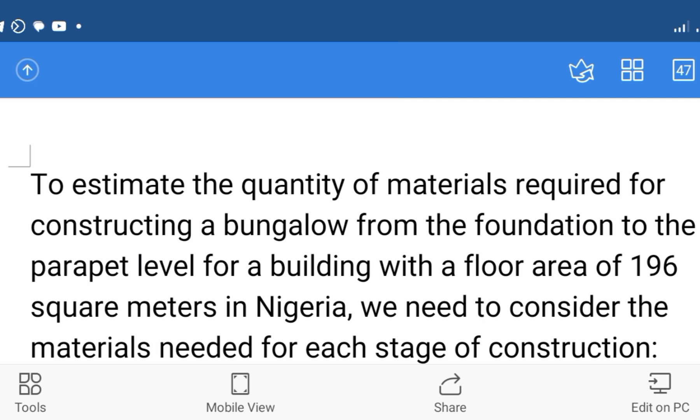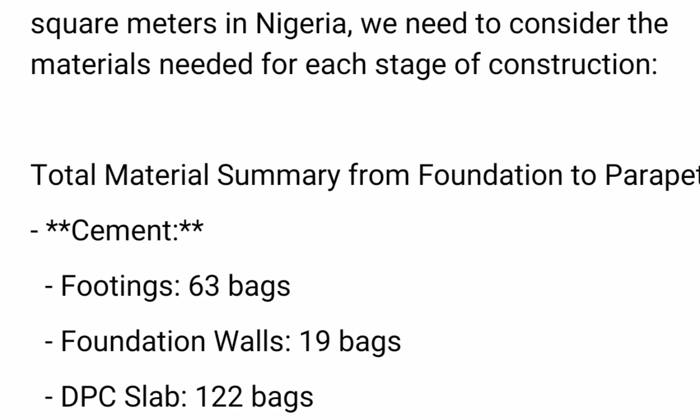We are just going to calculate the materials for you to know what to expect while building this kind of house. Actually, the example I use is a 5-bedroom bungalow.

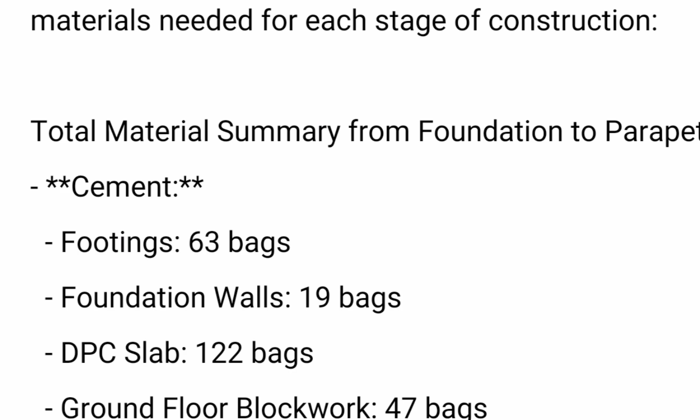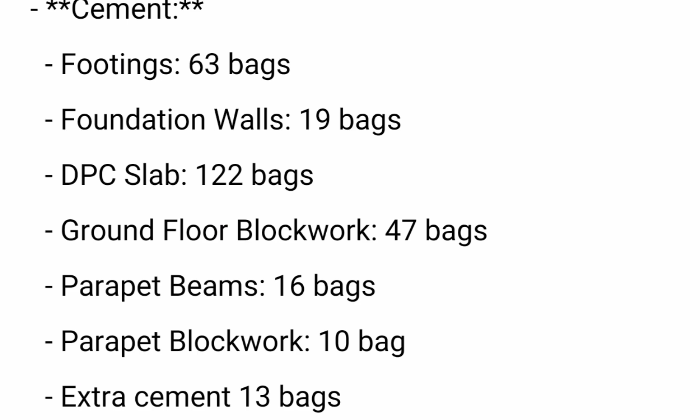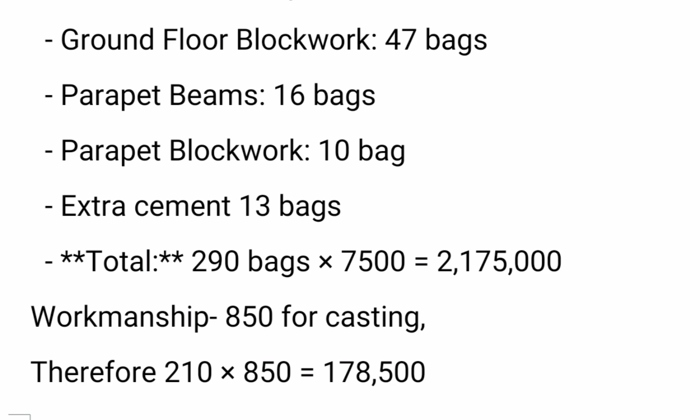So the total material summary from foundation to parapet: cement, during the footing level 63 bags, foundation walls 19 bags, DPC slab 122 bags, ground floor block work 47 bags, parapet beam 16 bags, parapet block work 10 bags, extra cement - I'm always talking about extra cement blocks, all these ones you need extra in case. So totaling 290 bags of cement at the rate of 7.5, and it gives us 2.175 million.

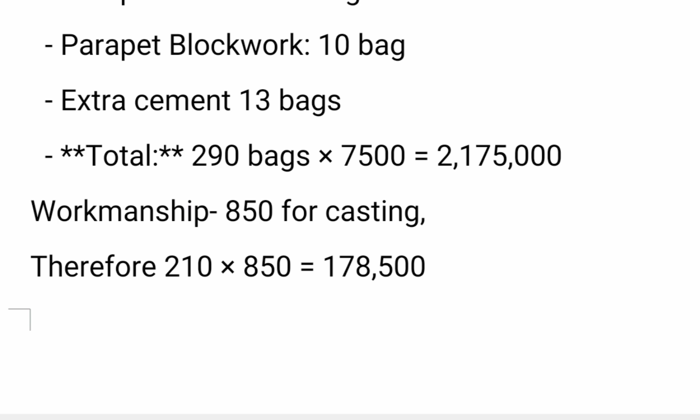Workmanship. Workmanship depends, that's why I had to break it down. It depends on your workers and your engineers. Some workers will prefer you paying per bag of cement, while some will just charge you, and both of you will bid and agree on a total price that they will do the whole work for. So here I worked with 850 for a bag of cement for casting, and when you multiply it, it gives you 178,500 for casting. I indicated it, please take note.

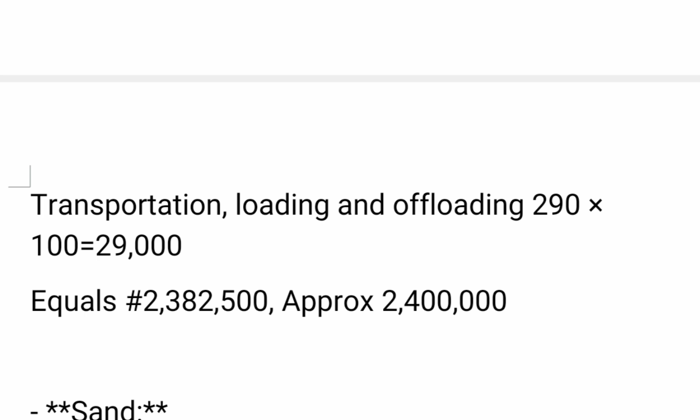Then transportation, loading and offloading - that one too depends. Some places, if you go to buy cement, they will charge you together with the price, so they charge you per cement. Some will just say pay us this for loading and offloading, while some sellers will be the ones to pay for the loading and offloading. So it depends on your area, but we just added it. This is a rough estimate, remember that. And this will give us 2.4 million.

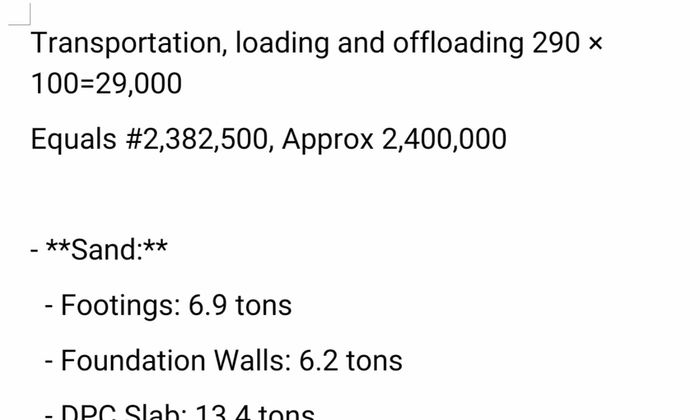Then sand: footing will have 6.9 tons, foundation wall 6.2 tons, DPC slab 13.4 tons, ground floor block work 18.6 tons. Remember that all these sands are not the same. When you talk about DPC, that is casting of DPC, you are talking about sharp sand. When you talk about block work, you are talking about laterite sand, for filling you're talking about laterite sand.

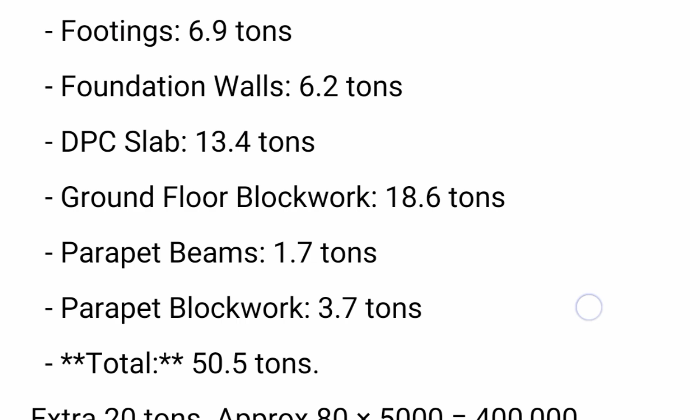Take note of that. Parapet beam sharp sand 1.7 tons, parapet block work 3.7 tons, total 50.5 tons of sand. So extra - normally when it comes to sand, the truck or the tippers normally carry 5, even that 5 is scarce, but 10 tons, 20 tons, 30 tons.

So for you to get this 50.5 and to avoid shortage, remember in my last video I told you guys that most of the times the measurements are not always up to what they claim to be. You might buy 10 tons and it will end up being 9, or 9 plus, or even 8 plus. So you have to add some, and that is why I calculated an extra 20 tons here to give us 80 tons.

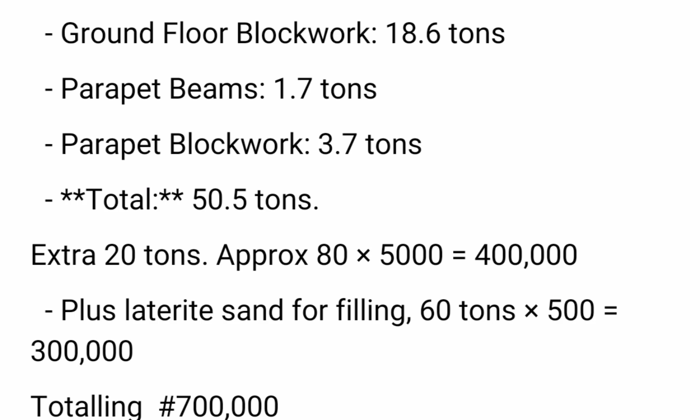It might be much, so it depends on you. And that gives us 400,000, about 5,000 per ton. Okay, so plus the laterite sand for filling. Don't forget that laterite sand, filling sand depends on the level of the place you are building.

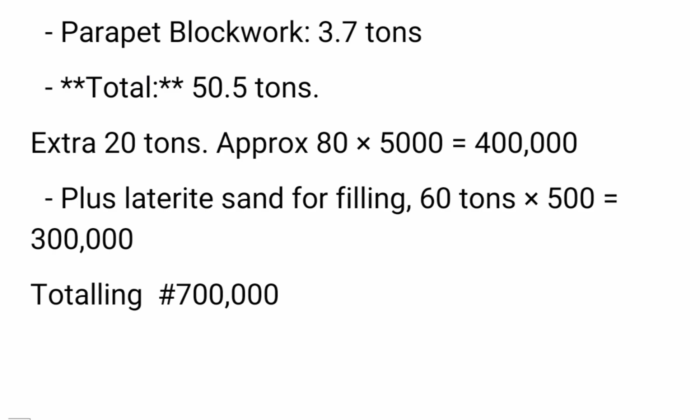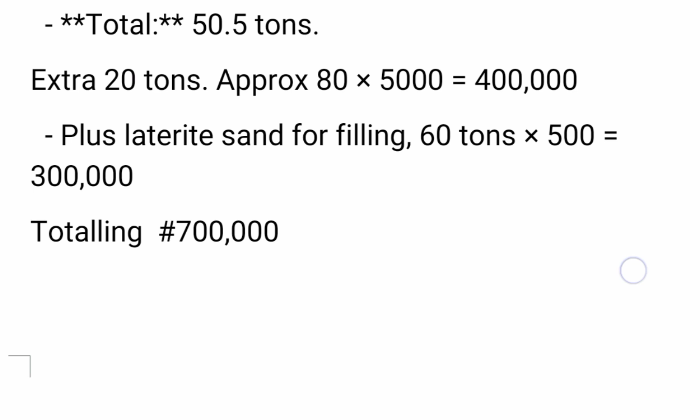If you need more sand, you will need even more than this. You might not need up to this, you might need lesser than what I just calculated. But I calculated 60 tons for this, times 5,000, not 500, please. And that will give you 300,000. Totaling for sand, 700,000 naira.

Then gravel. Gravel for footings, 12.9 tons. DPC, 26.9 tons. Parapet beam, 3.8 tons. Total, 43.6 tons. Extra gravel, 15 tons.

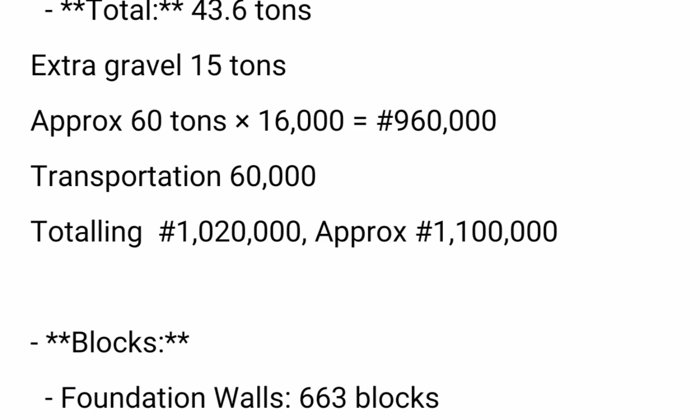That will give us 960,000 naira. Transportation for gravel. Some transporters charge together with the price of the gravel, some will charge you per pan, all right, some will charge you depending on the distance, your location. So it depends. But here we calculated 60,000, that will total 1.02 million, approximately 1.1.

Then blocks. Foundation walls, 663 blocks. Ground floor block work, 1,656 blocks. Parapet block work, 331 blocks. Then totaling...

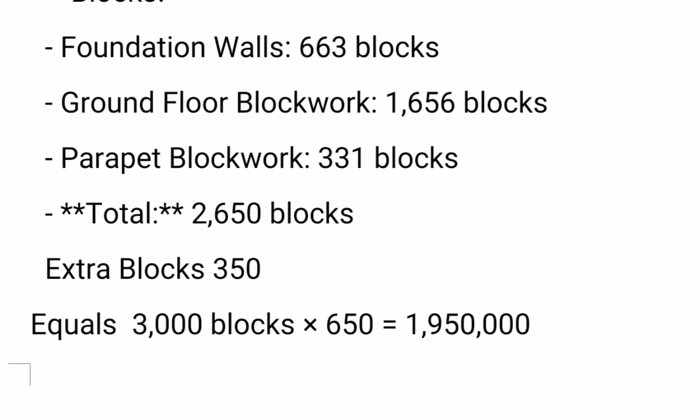2,650 blocks. Extra block. You should have enough extra block because we all know that blocks break so easily, from when it's still on the road coming, to when they are offloading, and all that, when it's being used. So we added extra 350 pieces of blocks, and that will give us 3,000 blocks by 650. Remember, we are working with 9 inches, and that will give us 1.950 million.

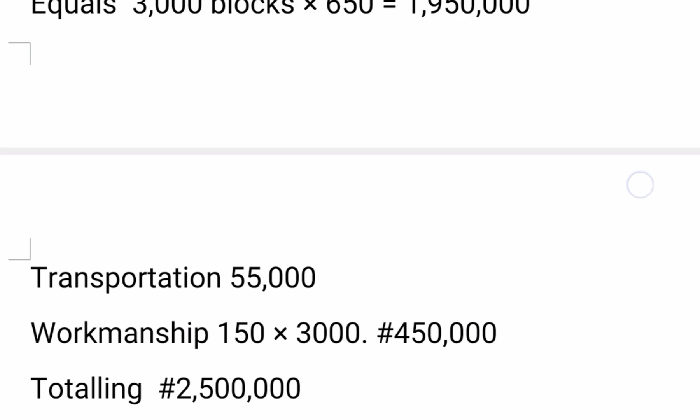Transportation for blocks. Some block sellers will charge you together with the block, some will charge you on its own, some will charge you even for offloading. So it depends on your area as well.

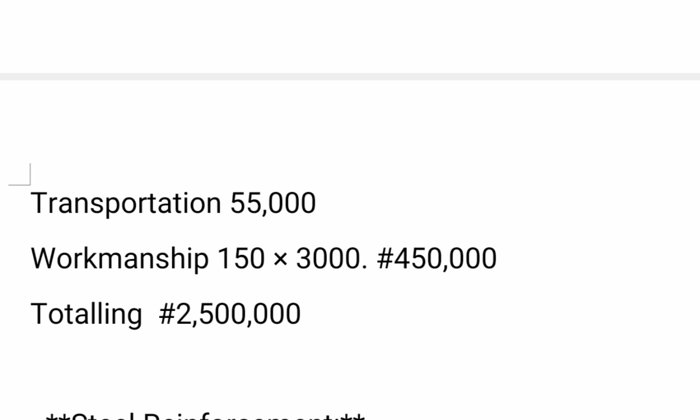But here we calculated 55 thousand. Workmanship, 150 per block. Laying a block these days is from 100 and above, it's very hard for you to see. Before it was 50 naira, 60 naira, 80 naira. But now, I believe that some places will still charge cheaper than what we are calculating here.

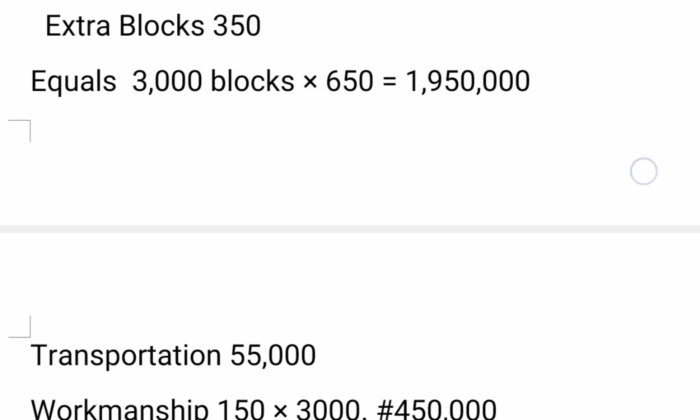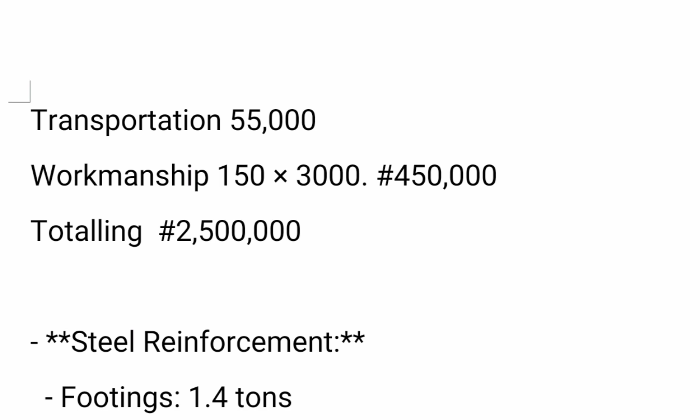But I calculated with 150 per block. I remember we said the total block we'll be using is 3,000 blocks. Okay, so here we are having 150 multiplied by 3,000, and that is 450,000. So when it comes to blocks, we are having 2.5 million naira.

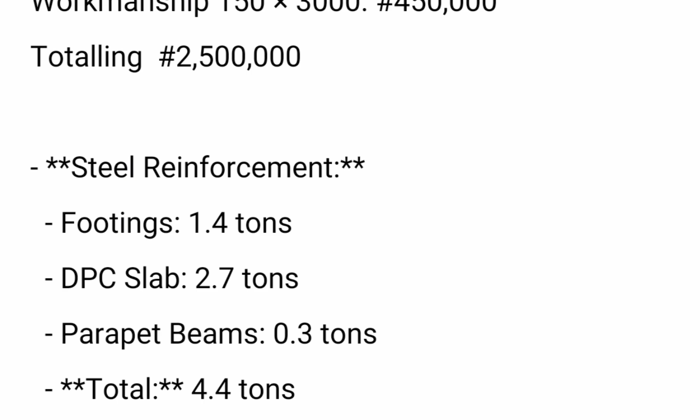Then steel reinforcement. Footing 1.4 tons, DPC 2.7 tons, parapet beam 0.3 tons. In this one, sometimes some people don't really use much rod during their DPC, okay, they don't. And that is why you see that they will tell you that a bungalow doesn't need much rod, but that depends on the type of soil.

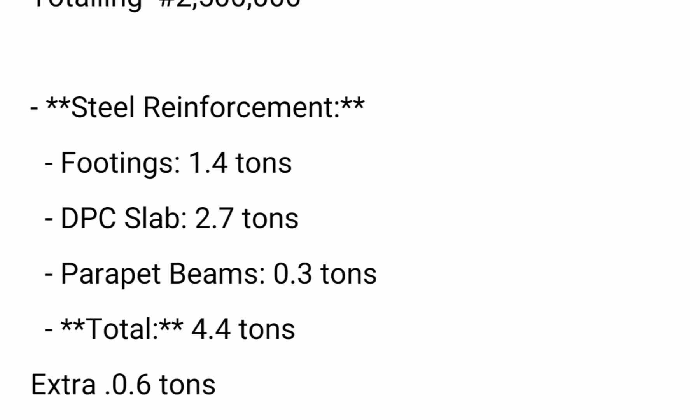Okay, if it's a swampy area, my dear, you need it, you need it if you don't want your house to fall. So that is why I had to come up with all this. But if your soil is a strong one, a dry place, you will not need much rod, then you might not need up to this. All right, so when you calculate it, we added extra 0.6 tons to give us...

5 tons. Multiply. Remember, we are working with 12 here. I told you guys it's not only size 12 that will be used, but let's just work with the one size that is mostly used, all right. So that is why I calculated with 12, you might use 8, you might use 10, okay.

You might use 16 if you need a big pillar, but for this bungalow, we don't need 16 that much. If you need a big pillar, you might need 16 as well. But here we are calculating with 12. I remember that 176 length of 12 makes up a ton.

So when you multiply it by 5, it will give you 880 lengths of rod. Then multiply by 10,000. But rod is not 10,000 everywhere.

Some places, like the one we bought last week, it was 8,005, if I'm not mistaken, but it's 8,000 something, so you can get it lesser. But also remember that there are complete and incomplete gauges. The complete gauge is always more expensive than the incomplete one. That doesn't mean the other one is not good, but you should know this. Some places you will get it less than 10,000 per length, some places you might get it at 10 or even more, depending.

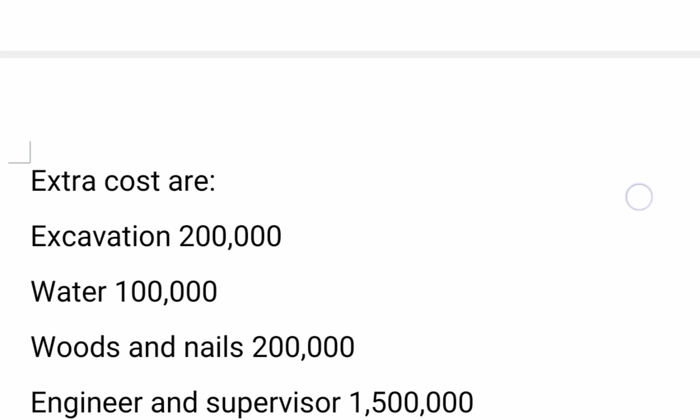I've explained that anyway. So extra costs are excavation, 200. Excavation, most people charge per square meter, so it depends on how much is being charged in your area and how many square meters you are using - the size of the area for your building. But here we calculated 200,000. To me that's on the high side anyway.

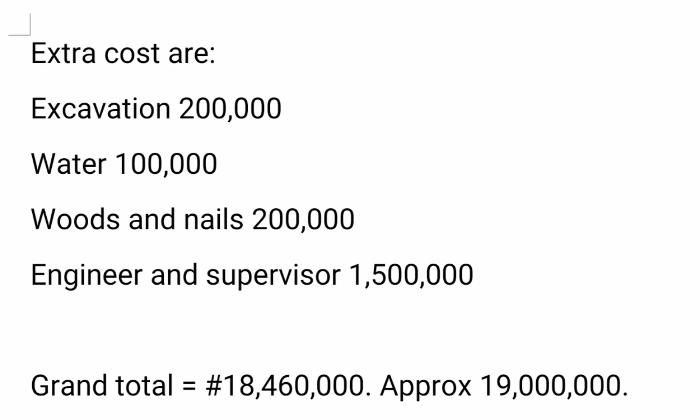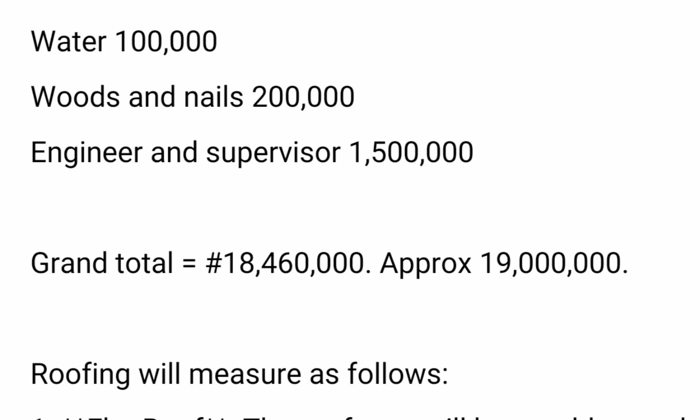Then your engineer and supervisor money, I calculated 1.5. Remember, it's not everybody that even needs an engineer while building. Some will just get an experienced man that knows what they are doing, because some of them are more experienced than certified engineers. But it's always advisable you get a well-experienced engineer to handle your work for you.

And this will give us 18.460 million, approximately 19 million. Now this is from foundation to parapet level. Now let's add the roofing.

When it comes to roofing, there are different types of roofs, and that will determine the measurements and the cost. Like flat roof, the roof area will be roughly equal to the ground floor area. If it's a flat roof, it will be nothing more than 200, because we are working with 196 square meters ground floor area, so it will be nothing more than 200 to 250, and you will calculate with that.

So if it's a hip roof, the roof area increases as the pitch becomes steeper. For example, if the pitch adds 15% more area, the roof area will be like 196 square meters multiplied by 1.15, and that will give you 225 or more, but the differences won't be much. That is what I'm trying to say here.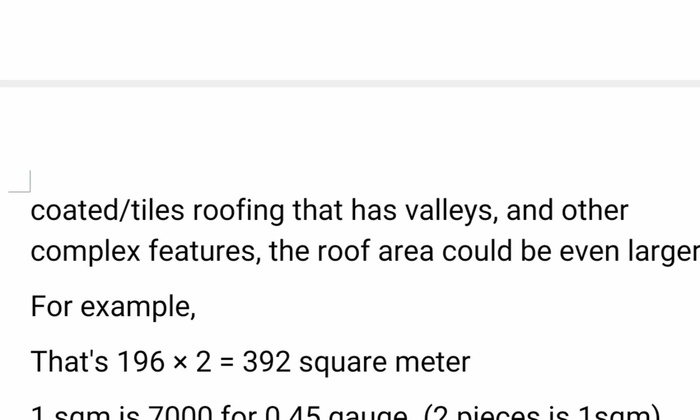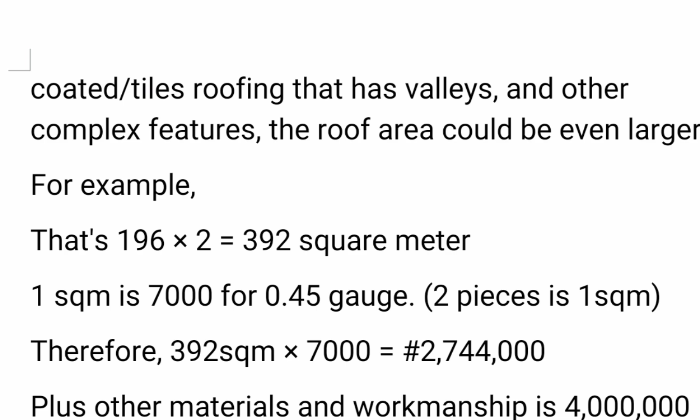Then if it's a complex roof design, for instance this stone coated tiles roofing style that has valleys and other complex features, the roof area could be even larger than that of the hip roof. For example, if the measurement of the floor area is 196, multiplied by 2 or even more, or 2.5 - here I worked with 2 multiplied by 2, and that will give you 392 square meters. I'm using this as an example. So 1 square meter is 7,000 for 0.45 gauge. When it comes to roofing sheets, they have different gauges.

They have 0.35... there's mainly 0.45, which I've come across people using. I don't know, but there's a lesser gauge, I think there's even 0.25 if I'm not mistaken. So I'm working with 0.45.

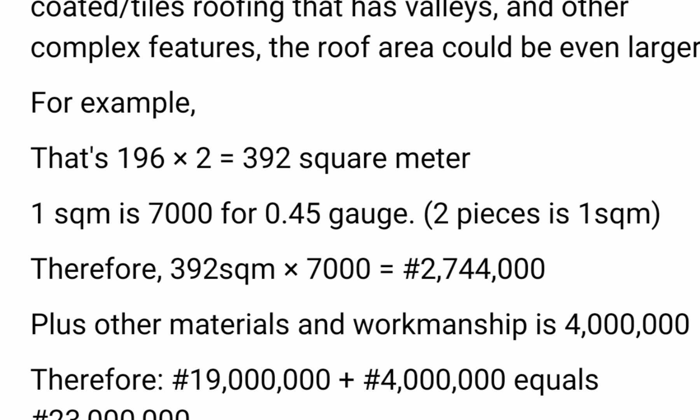Remember, two pieces of it make 1 square meter. You should always know that.

So when you multiply 392 square meters by 7,000, it gives you 2,744,000 plus other materials and workmanship. Remember, I did not talk about the woodwork, nails, and all that.

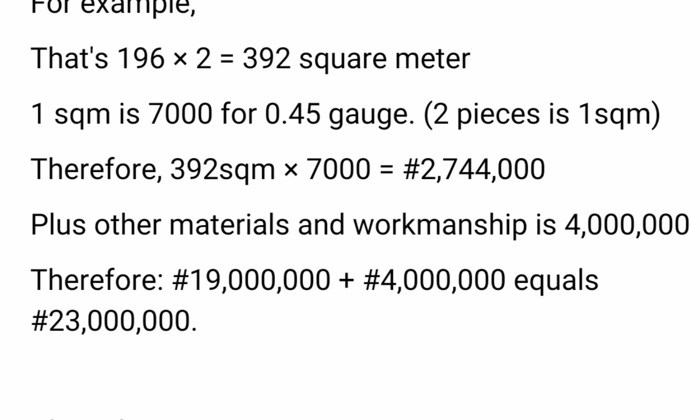So when you add all of them, you should expect nothing less than 3.5 million or more. Here I worked with 4 million naira. It depends, and remember the installation also, you will pay for it. So all those things is what you add up. You might even be getting more than 4 million.

Remember, I calculated with 0.45. If you are going for 0.55, that one is more expensive than 0.45. Now we are calculating with 7,000, but that one might be like 8,000 or even 9,000. So if you are going for 0.55, you should expect more than this.

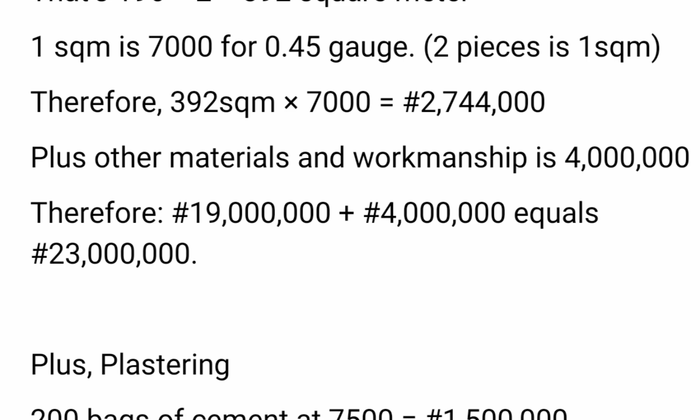So when you add up the 19 million we got from foundation to parapet to this 4 million, we are having 23 million. That is now from foundation to roofing level. We are having 23 million naira.

Now add the plastering. If you want to know how to calculate your materials for plastering, watch the last video and you will know how we came about this.

Here we worked with 200 bags of cement for this building, but remember you might need more than this depending on the design of your building, and you might need less depending on the design. If you have a spacious building, not a regular-sized room, with every room having toilets and other design features, definitely you'll need more bags of cement.

So here we worked with 200 bags of cement for the plaster at the rate of 7,500, and that will give you 1.5 million.

Then 60 tons of sand for this. You know how we calculate 1:6 to 1:4 depending on the thickness and all that. So this is what we got.

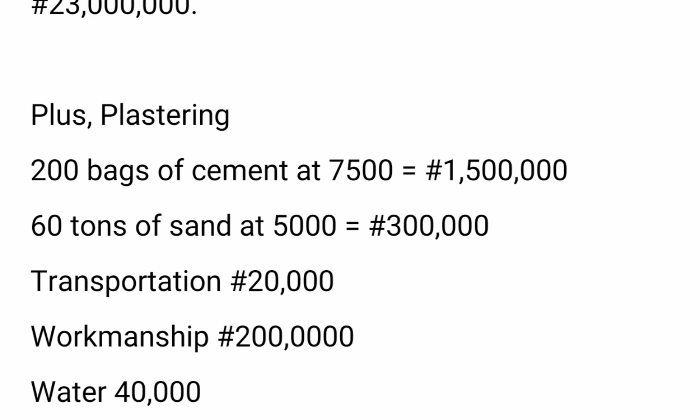And transportation 20,000, workmanship 200,000 — that is between you and your workers. Then water, as I said, you'll be needing water for your plastering, 40,000, totaling 2.06 million naira.

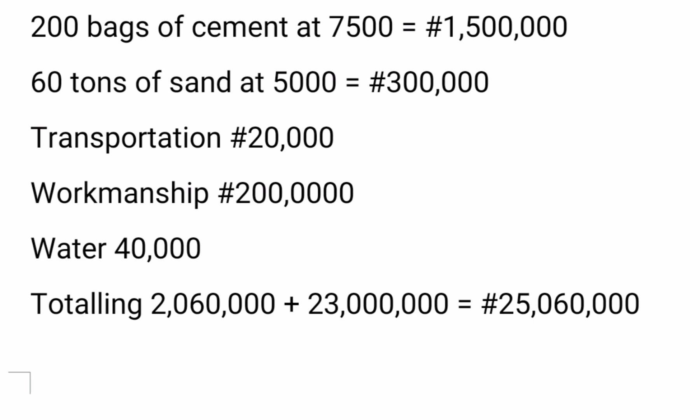So when you add that of foundation to roofing, which is 23 million, you are having 25.06 million naira. So I will tell you that when building this kind of house from foundation to roofing, including plastering, you should expect, depending on the design of your building, anything from 20 to 30 million.

Yes, let's put it that way — anything from 20 to 30 million. Someone once asked me in the comment section if 25 million can go a long way or can build a bungalow from foundation to parapet to roofing level. That is why I had to add up this roofing and plastering so he can know what to expect.

Always remember, disclaimer, I am not an engineer, I'm not a builder, I'm just a project manager.

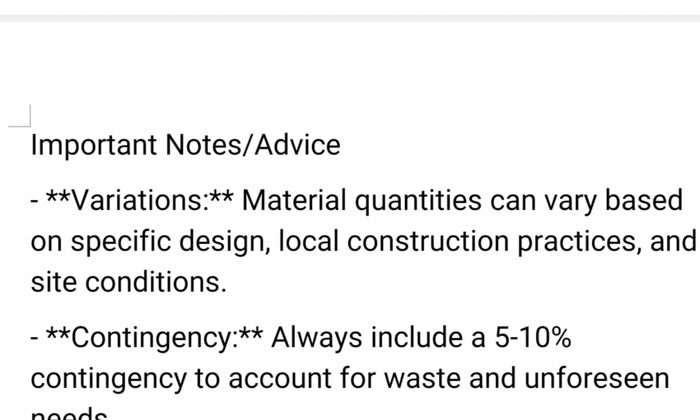My advice is that materials quantity can vary based on specific design, local construction practices, and site conditions. Always include up to 5 to 10% contingency to account for waste and unforeseen needs, and don't forget to always consult with an engineer or contractor for precise estimates tailored to your specific project location.

I believe this estimate should give you a solid foundation for planning the materials needed and the cost to construct your bungalow from the foundation to the roofing level, including plastering. I hope this video helps you in many ways.